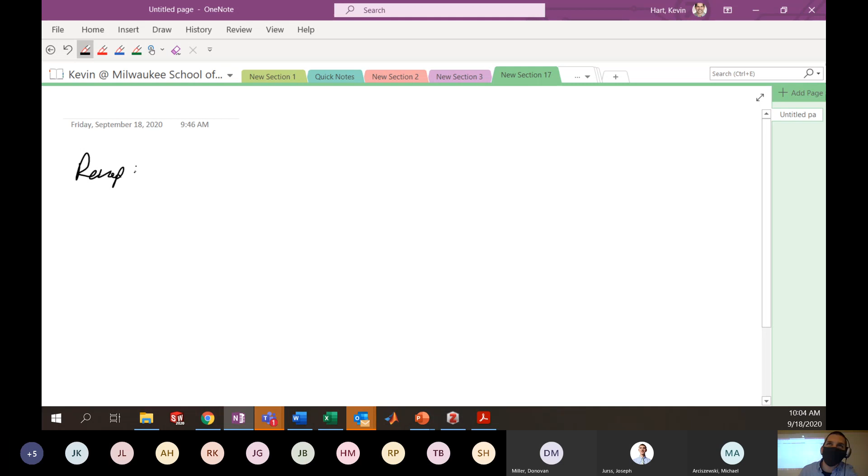And we'll recap a little bit about where we left off. We were talking, and this is in the principal stress notes, so here we'll just do a little recap of what we talked about last time, which is an introduction to principal stresses by talking about stress at a point.

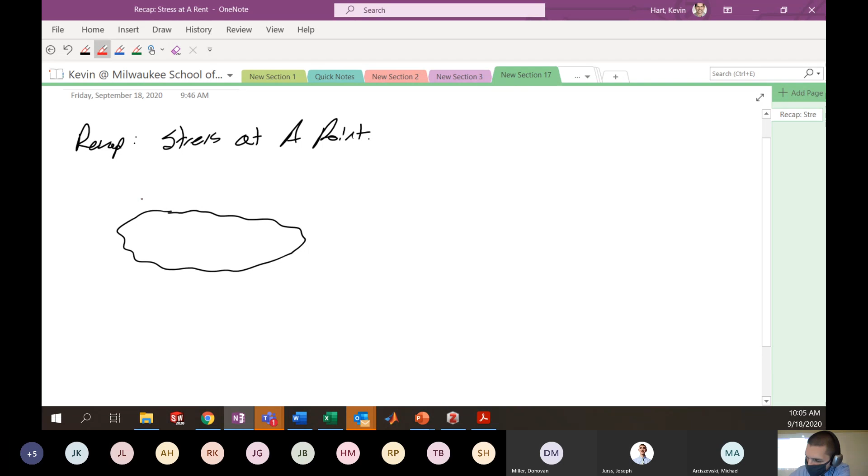We started the lecture, or midway through the lecture last time, by drawing a kind of mechanics potato that was supposedly three-dimensional, even though my drawing skills are suspicious — imagine this is three-dimensional. We drew a series of forces on this, if you remember. The idea here was: if we have some random point inside of this structure, let's call it point O, and we're interested in the full stress state, the three-dimensional stress state at point O, we need to cut through the structure and balance the forces to appropriately calculate things like the normal and shear stresses so that we can get the full state of stress.

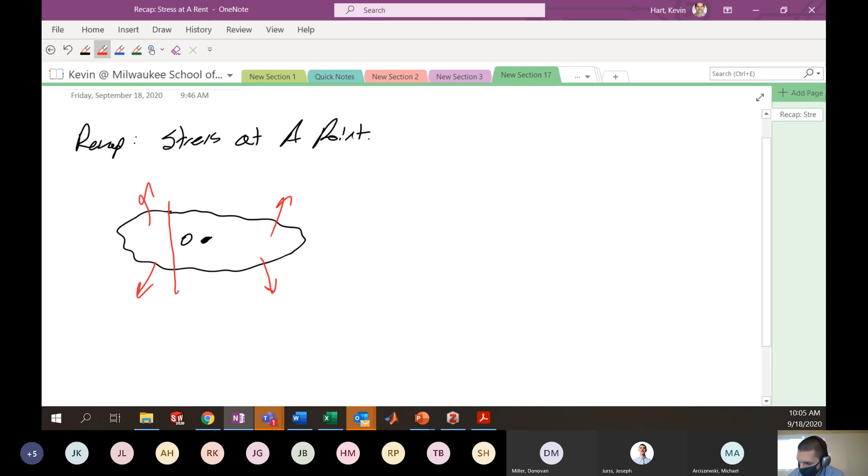So we went through an example where we cut through this guy in a plane that looked a little bit like this.

Okay, and that would give us a cross section here in our cut-through piece that contains point O and still has the remainder of the object on the backside that has some of these forces acting on it. We're going to get resultant forces and moments in this particular cross section, just like you were doing for your homework, relocating the forces on the structure to give equivalent reaction forces and reaction moments.

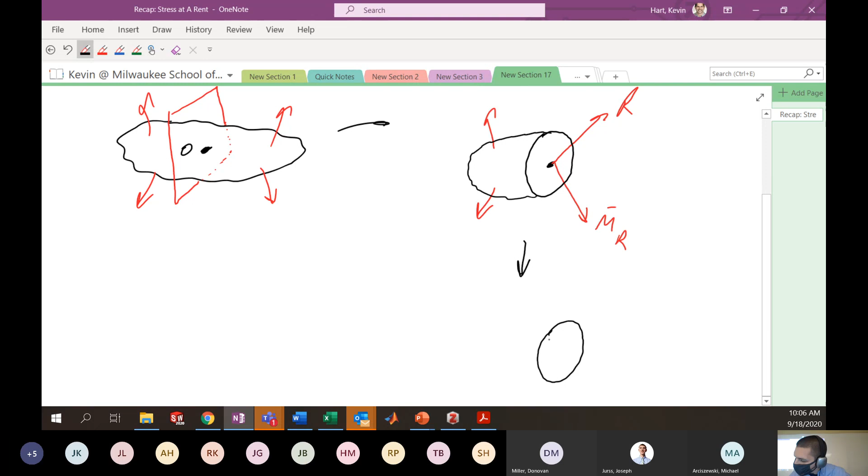And from that, we can then do calculations of the stresses on this particular cross section to get normal and shear stresses. So we end up using our normal and shear stress equations for transverse shear, torsion, axial stress, and bending to give the stresses in this cross section, specifically at this point of interest, point O.

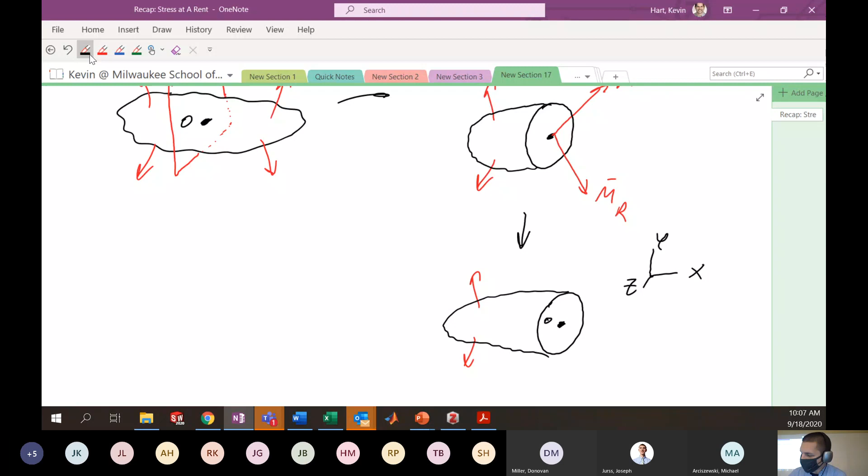So if we have some coordinate system here for this particular piece, which is X, Y, Z, then we can begin to accurately define some of our three-dimensional states of stress with the cut that we have here. So here we've cut through the YZ plane, and this is at point O.

The result here is that we can determine the normal stress on this cross-section, coming off the normal direction here. For normal stress, we use the variable sigma. This normal stress is on the x face in the x direction, so we denote the subscripts as sigma xx, or often you'll just see it as sigma x.

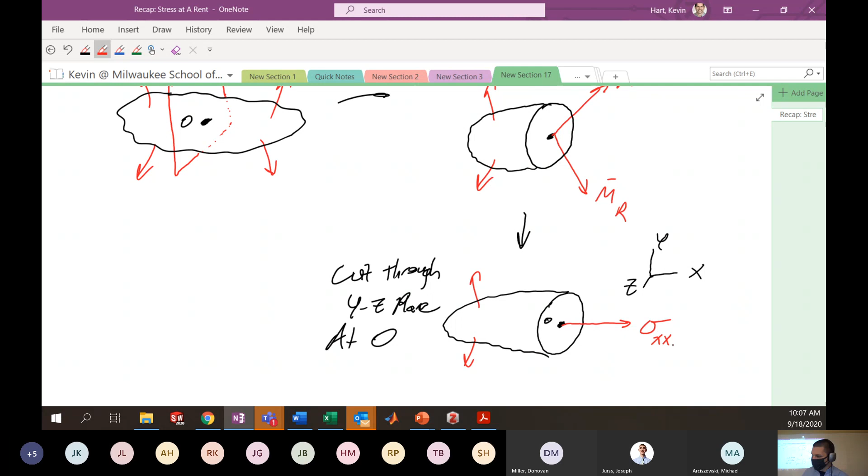As a reminder, when we're using the two subscripts on our stresses, we're defining the face upon which it acts and the direction. That is the normal stress coming off of this face.

We also could potentially have a shear stress on the x face in the y direction and a shear stress on the x face in the z direction. So we could have tau xy and also tau xz.

So by cutting my potato arbitrarily at point O along the YZ plane, I end up with three states of stress that I can calculate using my combined loading strategy that we talked about in week number 1.

So we cut along the YZ plane at O, and we're going to get sigma xx, tau xy, and tau xz. You'll notice when I cut through the YZ plane, the stresses I get are all on the x face, so the leading subscript is all x's in this situation.

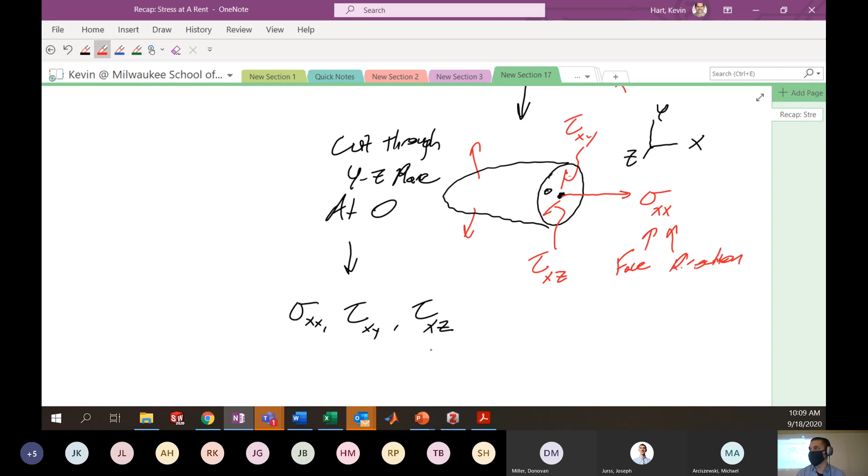Now, that is not the full picture of the stress state at O. I have to do more cuts to get the additional stresses, like the normal stress in the y direction or the normal stress in the z direction. So we need 3 orthogonal cuts to fully define the stress at O. We need 2 more cuts, in quotes, to give the full stress state at O.

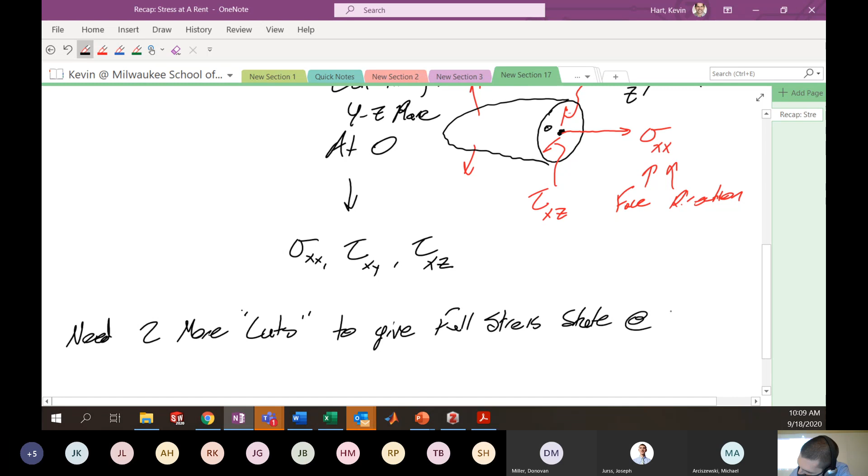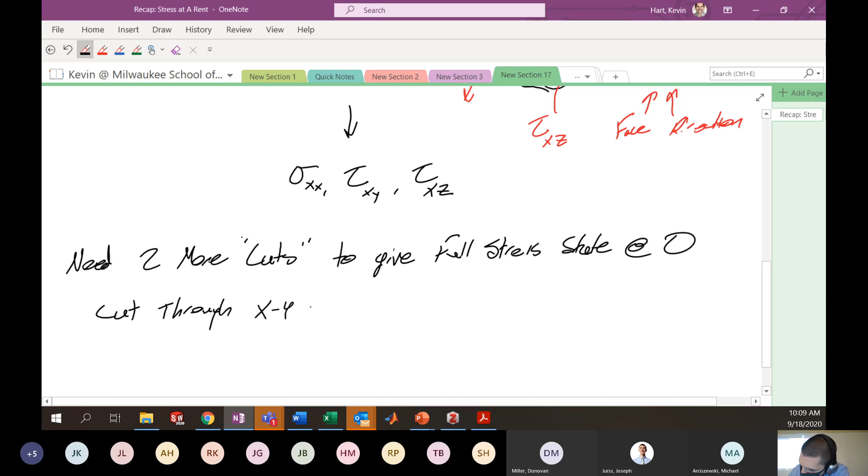So we might cut through, let's say, the XY plane, and have a picture that might look like this. We cut through the XY plane, cutting across the face we already see. Here's maybe my potato face, and we've cut through it so that we're cutting through this plane that is parallel to the page we're looking at. Here in the middle is again your point O, and we'll keep the same coordinate system with X, Y, and Z.

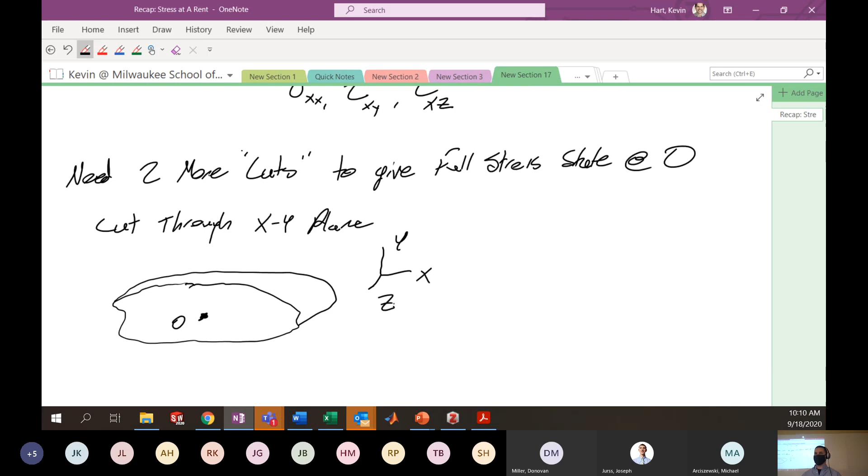Now if I cut through the XY plane, I have the Z face exposed. And if the Z face is exposed, then I can have my sigma ZZ, because it's on the Z face in the Z direction. That's the nomenclature we're using.

And with this cut, we can also define the shear stresses in the two directions, which would be on the Z face in the X direction and on the Z face in the Y direction. So here we have tau on the Z face in the X direction, and here we have tau on the Z face in the Y direction.

Same idea if we go through what is the last plane that we need, which is the XZ cut. You might have your potato now looking like it just got its head lopped off.

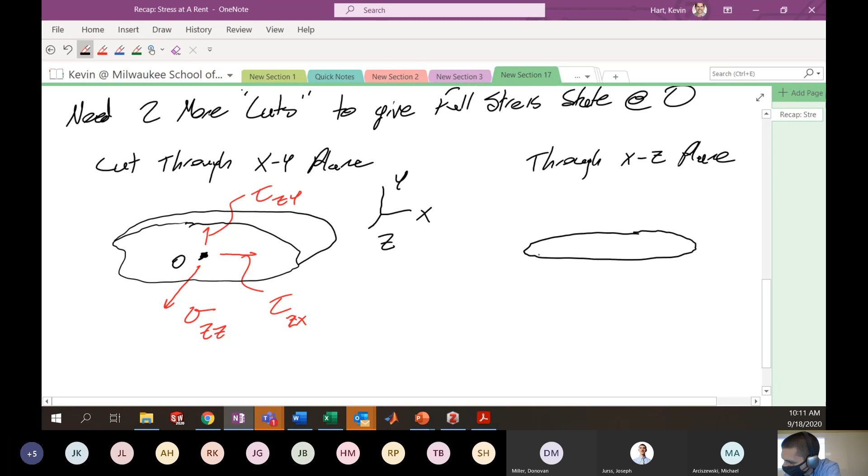Just like 18th century France. You got your head chopped off.

Here's again our point O. And now it's the y direction that is the normal to the surface. So we can define sigma yy. We can define what is tau on the y face in the x direction. And we can define, this one's a little harder to draw, but here's another shear stress, tau on the y face in the z direction.

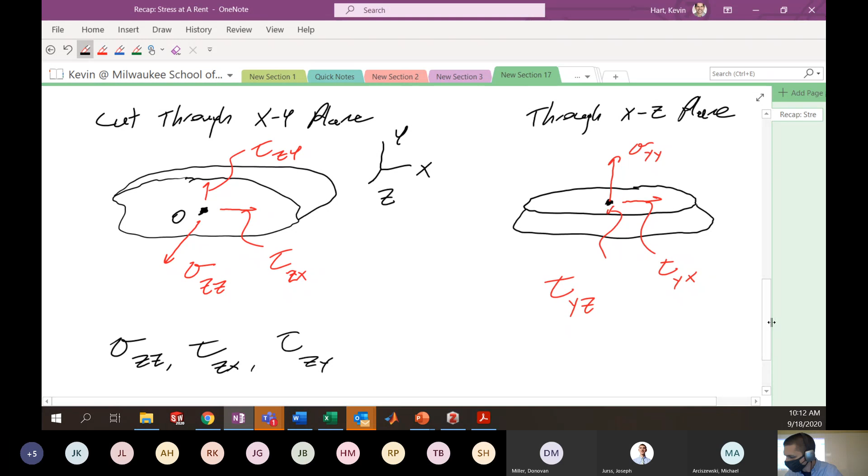So each one of these individual cuts is giving us like 3 states of stress. So here this is sigma zz, tau zx, and tau zy. Here's this sigma yy, tau yz, tau yx.

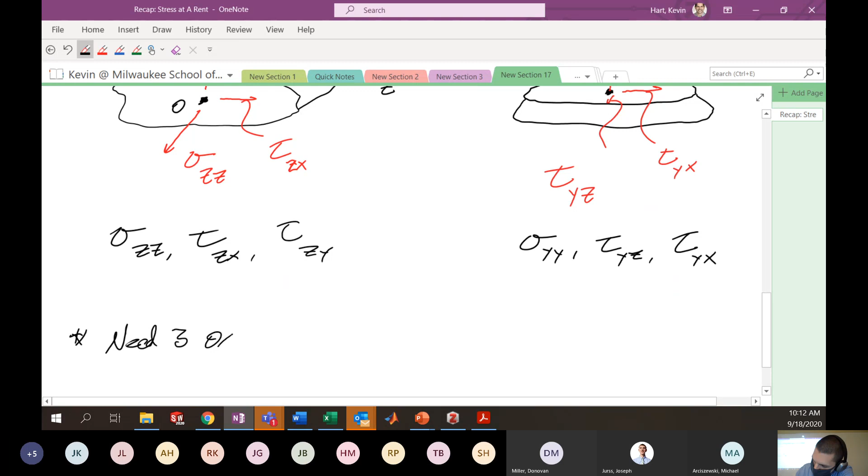So the point is I need 3 orthogonal cuts to really define all of the stress states. And I have 9 possible stress states that could exist at any particular point. So we're getting into new material now, saying we need 3 orthogonal cuts to fully define the stress state.

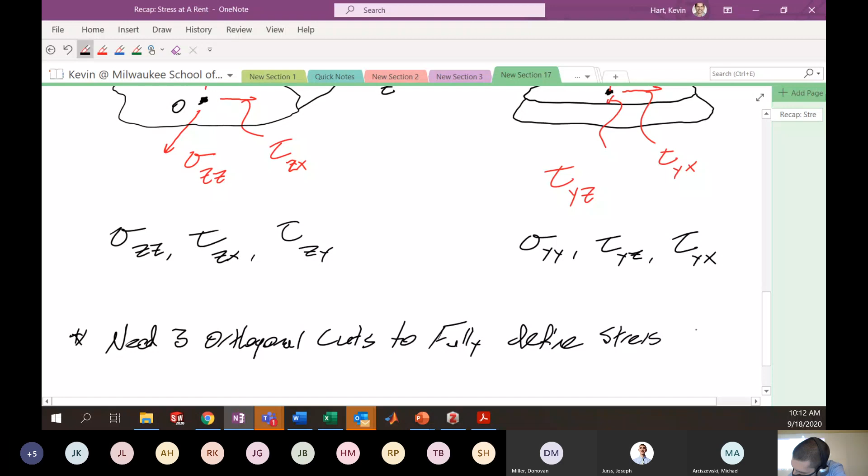Okay. And we have 9 states of stress, the normal stresses, and all kind of 3 of these normal directions would be like sigma xx, sigma yy, or sigma zz.

Man, my hand is shaking. I had way too much coffee this morning. I had like a liter of coffee. It's like a liter of cola. Anyone super troopers? No, super troopers. No. Okay. I want a liter of cola.

And then there's 6 shear stresses.

Looks like I might have a question in the chat here. We have a question. No question.

Okay, the 6 shear stresses that you might have are tau xy, tau xz, tau yx, tau yz, tau zx, and tau zy.

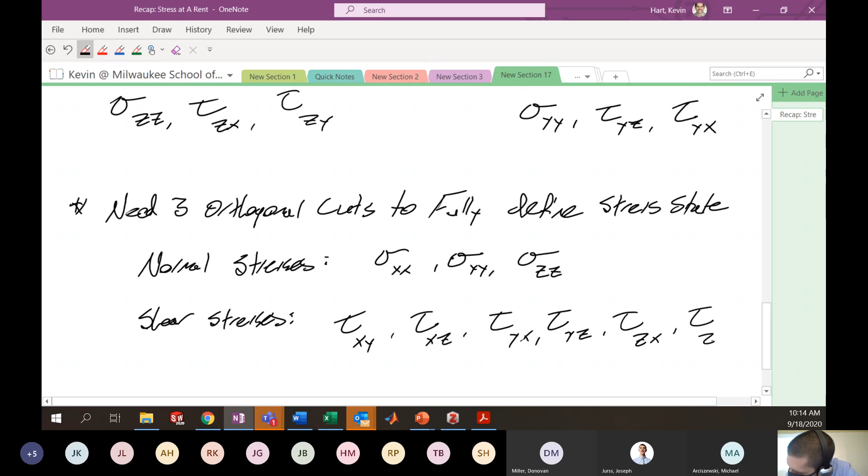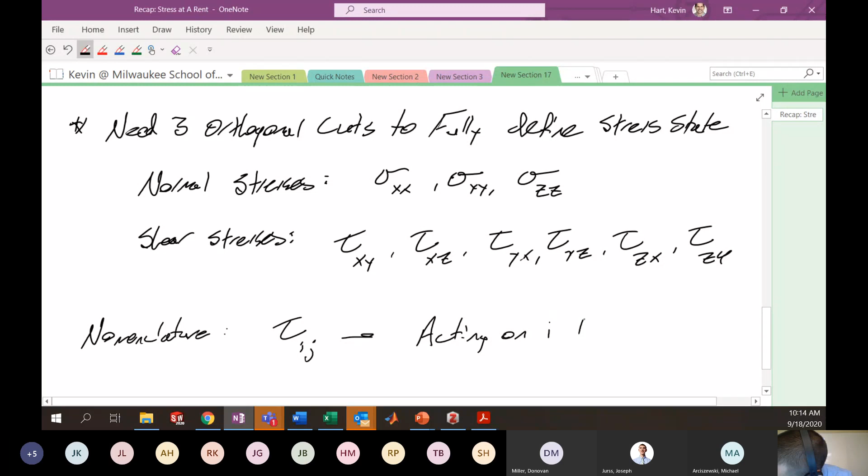Now I'll be very specifically clear here with the nomenclature. I've sort of alluded to this already, but I want to make it crystal clear. When we're talking about a shear stress, we would have something like tau ij. The nomenclature here is that this is the shear stress that's acting on the i face in the j direction.

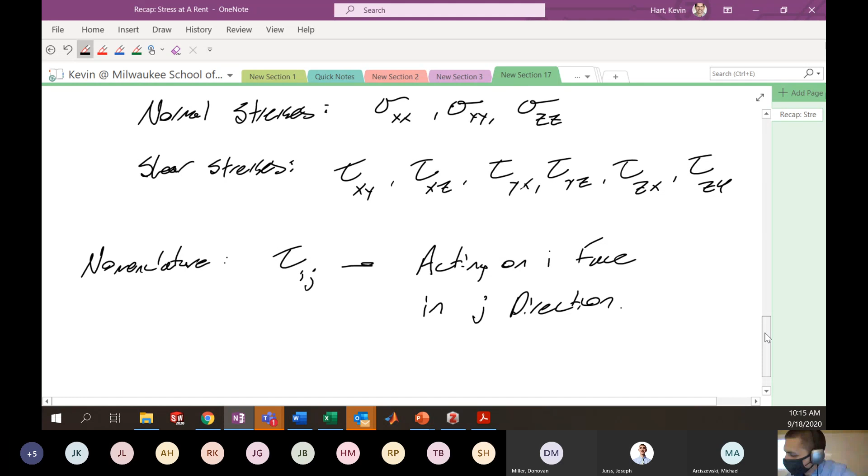Now, maybe you learned this in your 2004 class, but if you're working with conservation of momentum, which is pretty much what we're doing in this class, we're considering everything to be more or less static, so not moving, so energy and momentum are conserved. The derivation of this is beyond the scope of what we talk about, but the basic idea, which you probably talked about briefly in your 2004 class, is that shear stresses with subscripts ij will be equivalent to shear stresses with subscripts ji. So for instance, tau xy is equal to tau yx, tau xz is equal to tau zx, etc.

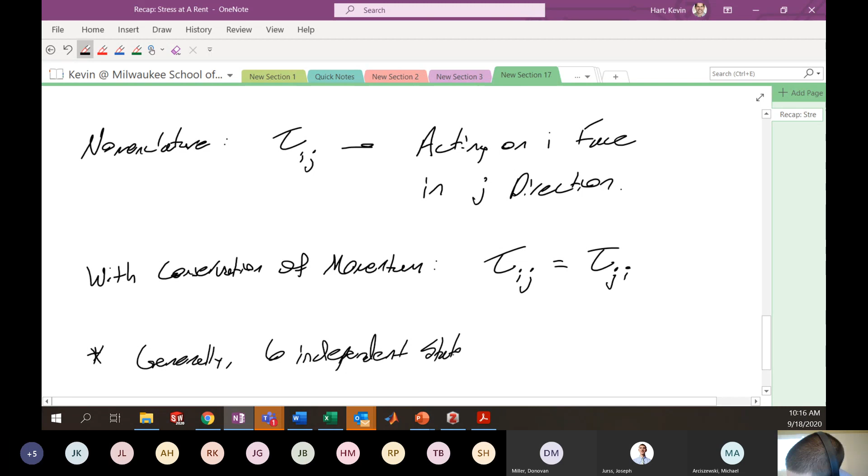So in general, we can look at 9 states of stress, but only 6 of them are independent. And that's because conservation of momentum redundantly shows 3 states of stress. So generally, we have 6 independent states of stress.

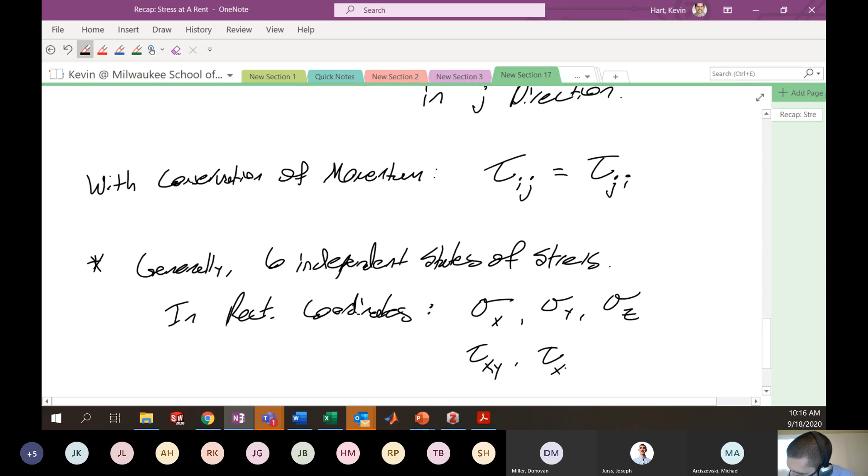In rectangular coordinates, which is what we're working with exclusively here, that's going to be sigma x - we'll make this shorthand, instead of writing the two x's, we'll just have one x. Sigma y, sigma z. In this class, we'll use as the shear stresses tau xy, tau xz, and tau yz. And we know that flipping those subscripts would give us redundant stress values.

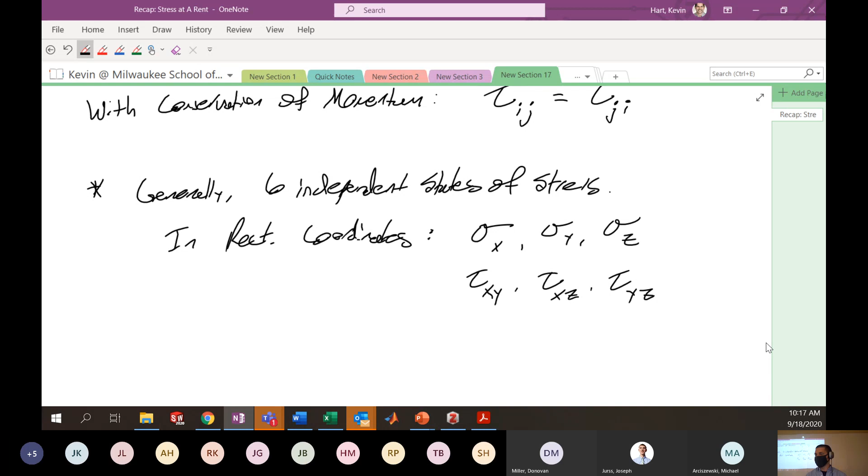Now, the 9 states of stress, 3 of which are redundant, usually get represented when talking about the 3-dimensional state of stress in a matrix form. Or more mathematically accurate, we'd say it's represented in what's called the stress tensor. Have you guys talked about tensors before in any of your math classes? Nope. Okay, I'm not even going to touch that then. Let's just call it the stress matrix.

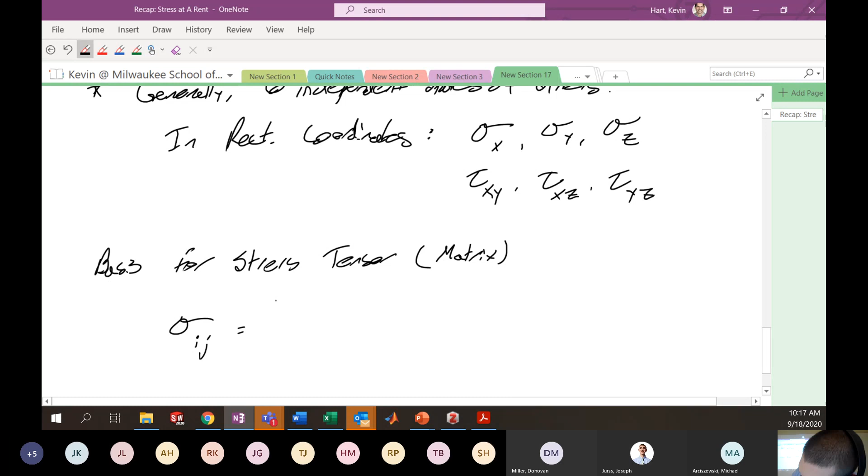So this is the basis for what's known as the stress tensor - this is the technically accurate name, or some people call it the stress matrix, which is not exactly accurate, but okay. It would be represented as something like sigma ij, equal to a matrix that allows us to show all states of stress at one particular time. It would have the normal stresses in the diagonal and the shear stresses in the triangular portions of the matrix. So this is a 3x3 containing sigma xx, sigma yy, and sigma zz in the diagonal.

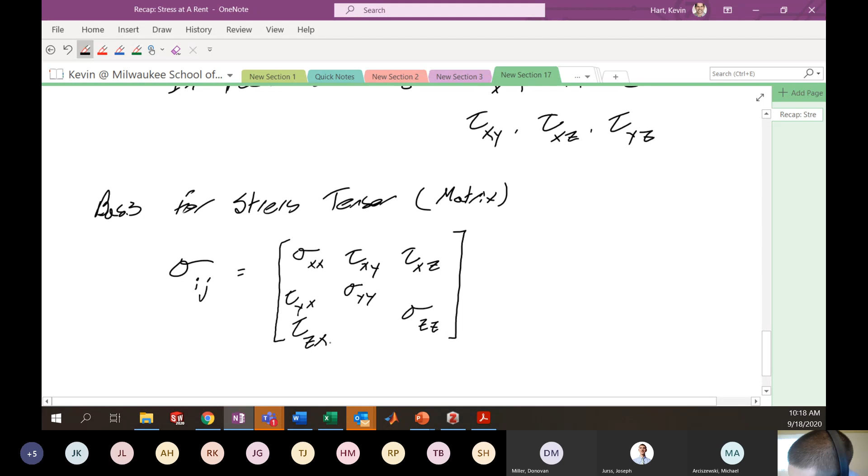And then the shear stress components are going to be along the triangles at the top. So this here is like tau xy, tau xz. Here we have tau yx, tau zx. Over here we have tau yz and tau zy.

So this here is sort of the matrix that is commonly used to represent the full stress state at any particular point. So when someone is asking you what's the full stress state, you could represent it using a matrix that looks like that, where maybe there's numbers filled in. 100 MPa for this value, 80 MPa for this value, so on and so forth. So you may see the full stress state represented in this 3-dimensional sort of manner. This is sort of the basis for 3-dimensional representation of stress at any particular point.

You will see this formation again multiple times in this class, where I might give you a homework prompt that says the full state of stress at the point is bang. And I'm going to ask you, what's the principal stress? What's the maximum shear stress? Blah, blah, blah, which we're going to get into and talk about in the lecture notes to come. So if you see me present a matrix like this, hopefully you understand that's the full state of stress.

Now, this is what it's sort of represented in like a mathematical formation, but people have also used graphical representations of what's happening here. And to represent the full state of stress at a particular point, we would consider the 3 orthogonal cuts that we made to be like 3 sides of a cube.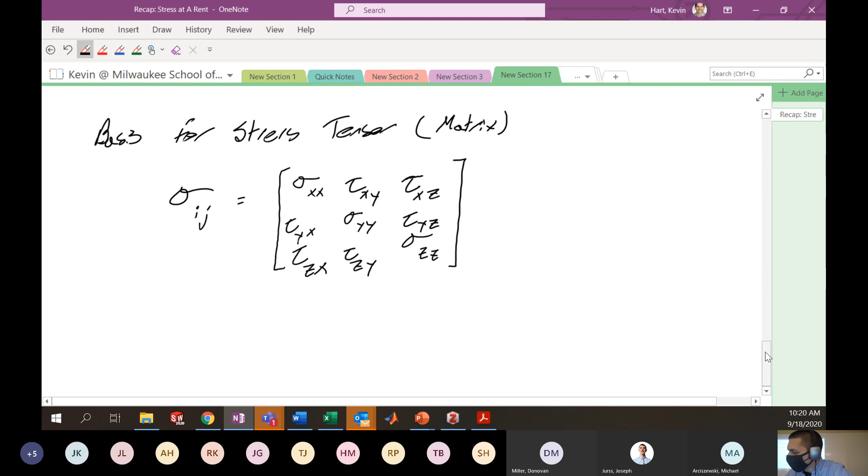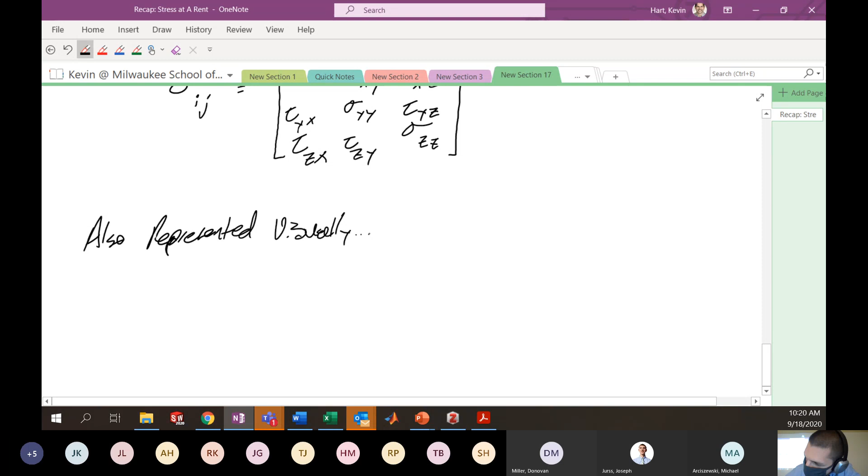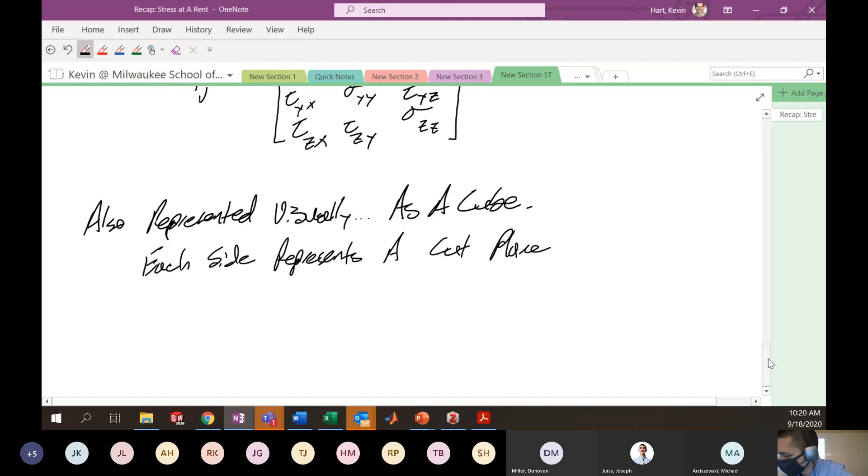So you may represent this visually as a cube, where each side represents a cut plane. So what do I mean by that? Well, when we took our potato, we sort of showed 3 different images of that potato with 3 different slices through it in the 3 orthogonal directions. If we thought about taking those faces that we cut through and making a cube out of those faces, we could represent all the stress components on a singular cube by drawing it appropriately. So I'm going to do my best to make that cube here and give you a representation of what that might look like.

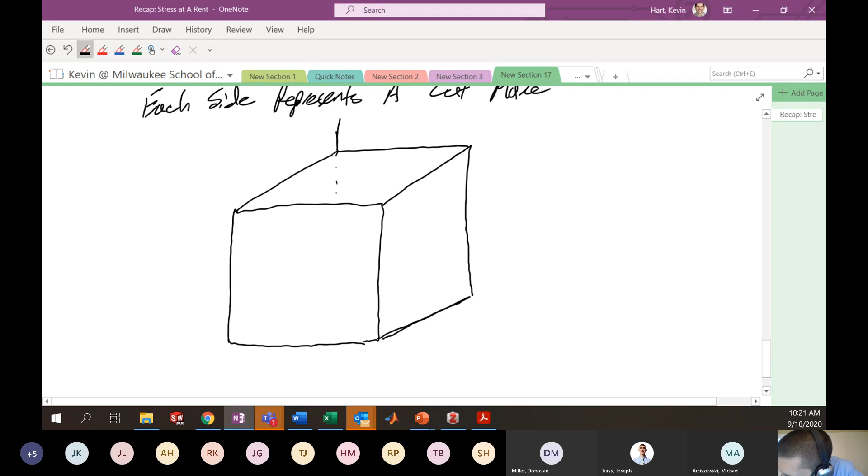Give yourself some space on the paper to draw this accurately. There's also a picture of this in the notes. And let's have a coordinate system here that's running through the whole thing, like X, Y, Z. And we're going to represent all of the stresses on this face based on the cuts that we made to establish the stresses on all of these faces.

So this face here would represent the cut that we made on the YZ plane, and similarly for the top and this side. And so let's draw the stresses that result on each one of those planes, and you'll see what is this full three-dimensional stress state, or what is typically known as the stress cube.

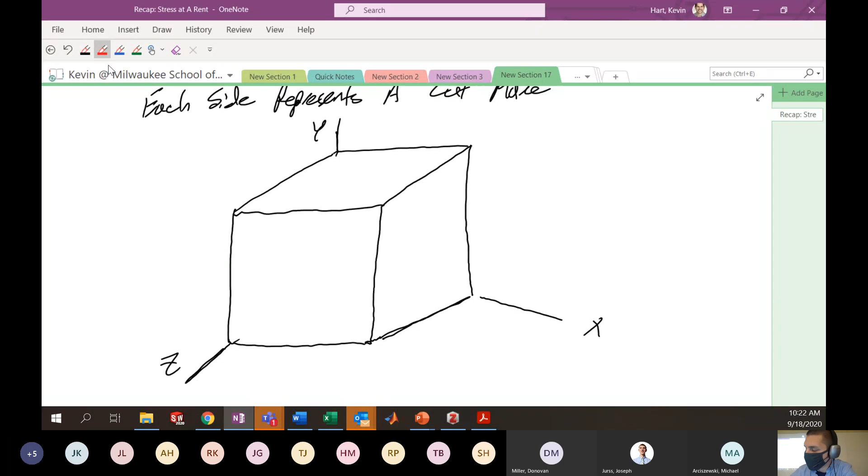So we're going to have the normal stress coming off here, which is sigma xx. We're going to have a shear stress on the x face in the y direction, so this is tau xy. And we're going to have a shear stress on the x face in the z direction, which is tau xz. Similarly, on this face coming off here, we'll have sigma zz, a shear stress on the z face in the x direction, and a shear stress on the z face in the y direction.

On this face, we're going to have a stress coming off the normal direction, sigma yy. We'll have a shear stress on this face, which is the shear stress on the y face in the z direction, and here we have a shear stress on the y face in the x direction. These are your 9 stress components.

And the redundant ones would be ones that sort of pinch corners together. So tau yz and tau zy are redundant. This tau zx and this tau xz are redundant. This general picture is commonly called the stress cube. I think of my office as the stress cube, but this is the real stress cube.

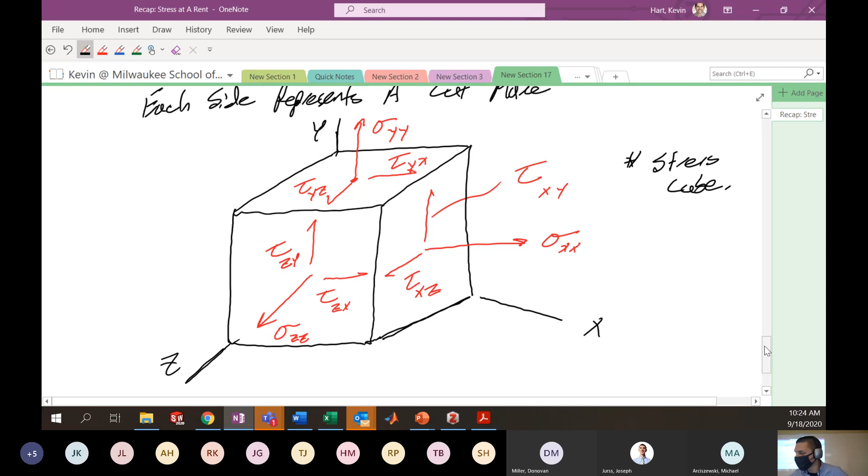You have seen this idea before in ME 2004. When you were in 2004, you generally talked about a two-dimensional state of stress, usually represented with a single square looking at one particular face of the cube and neglecting all of the out-of-plane stress components. I'll show you how this cube gets simplified to what you've normally seen in your 2004 class, and that is by assuming a state of plane stress.

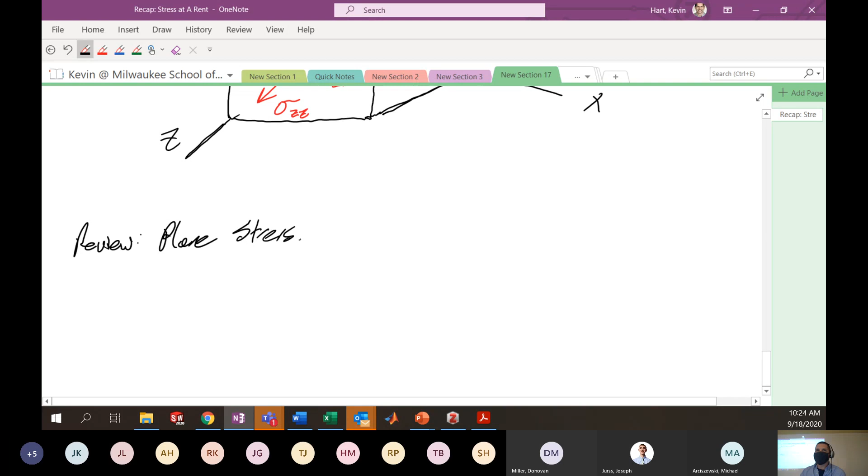Let's review plane stress quickly. You should have talked about plane stress in 2004, but I'm going to bring it home here for you just a second. There are many situations in the world where you can assume that the out-of-plane stress components are equal to zero.

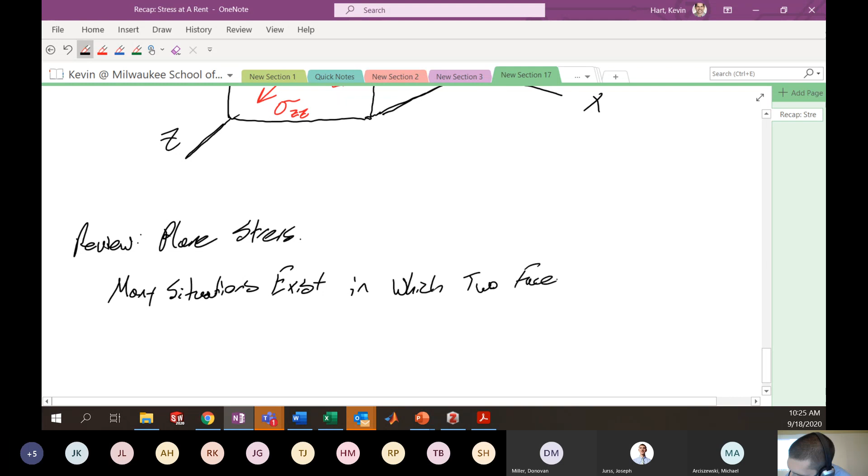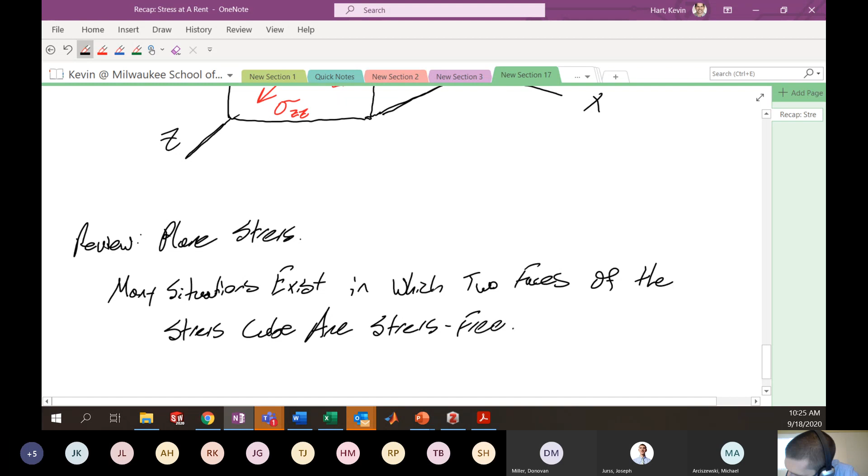Many situations exist in which two faces of an element, or of this stress cube, are free of stresses. We would call this a state of plane stress.

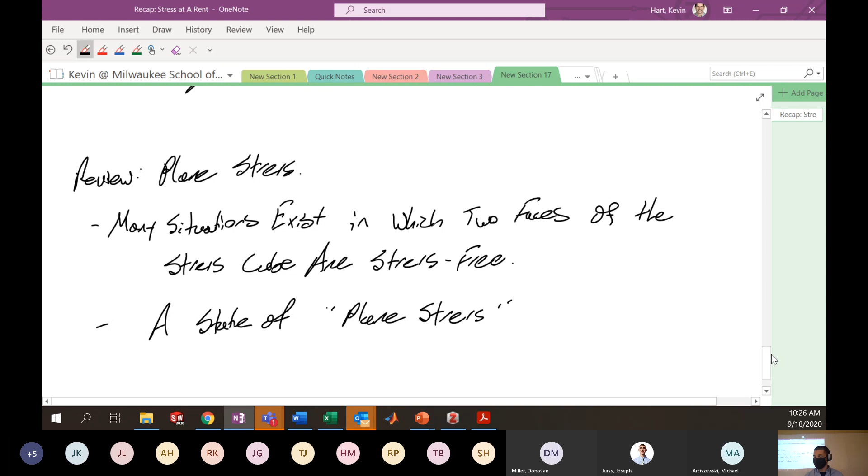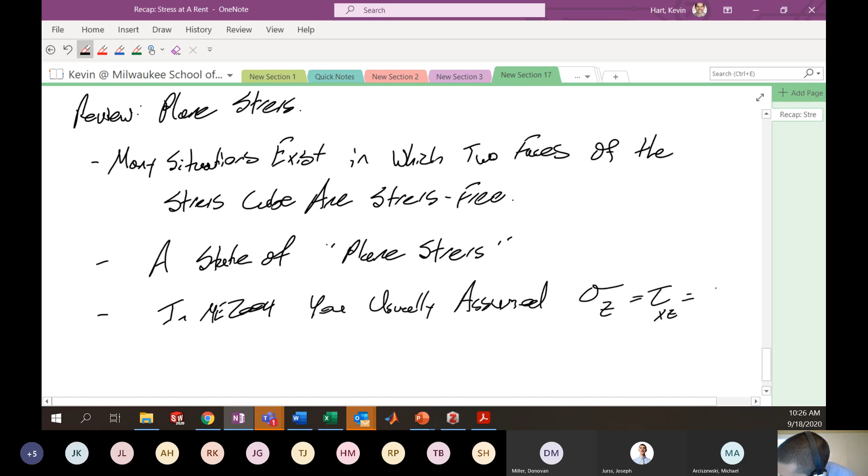Typically, when you were working in 2004, you assumed that the z direction was stress-free, meaning you had no stresses, either shear or normal, in the z direction. So in ME 2004 you usually assumed, whether you knew it or not, that sigma z, tau xz, tau yz, tau zx, and tau zy are all equal to 0. Those are assumptions you usually made to assume a plane stress condition, and this leads to a 2D state of stress.

Let's go back to our cube and draw what it would look like if all of these stress components were neglected and set to zero. This is the stress cube for plane stress. I'll draw it a little more quickly. So if we assume that sigma z, tau xz, tau yz, tau zx, and tau zy are all equal to 0...

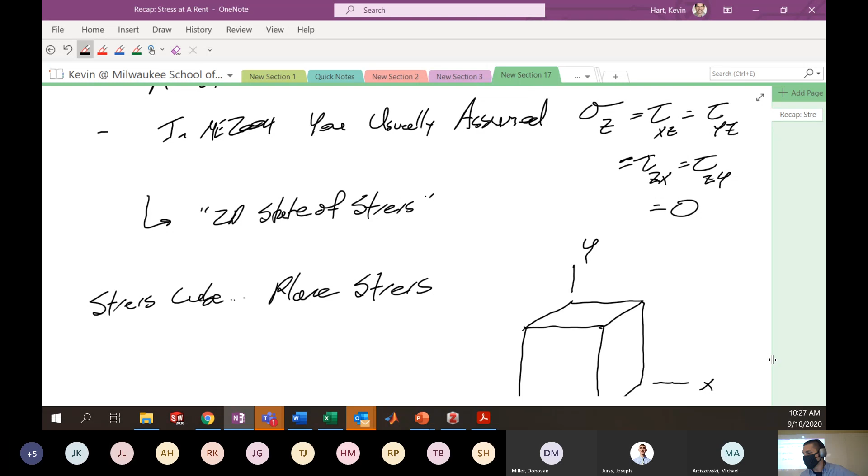...then everything associated with that face goes away. The normal stress and shear stresses on that face go to zero. The only stresses you'd see are on what would be the xz plane and the yz plane. So you'd see coming off here a sigma yy, coming off here a sigma xx, then here your tau xy, and here your tau yx.

You would not have this component of shear, because for that component to exist, you'd have to have that other component of shear. So those guys do not exist because your tau zx is equal to zero.

Now remember, to balance this out you have to have these stresses on the opposite side to make things hunky-dory. So looking at the bottom or back side of this cube, you'd have, to balance, on the negative y face and negative y direction another sigma yy. You'd have on the negative y face and negative x direction this guy on the bottom side, and on the negative x face and negative y direction, thinking of this as the back side of the cube, a tau on the negative x face and negative y direction, and also here your tau on the negative y face and negative x direction.

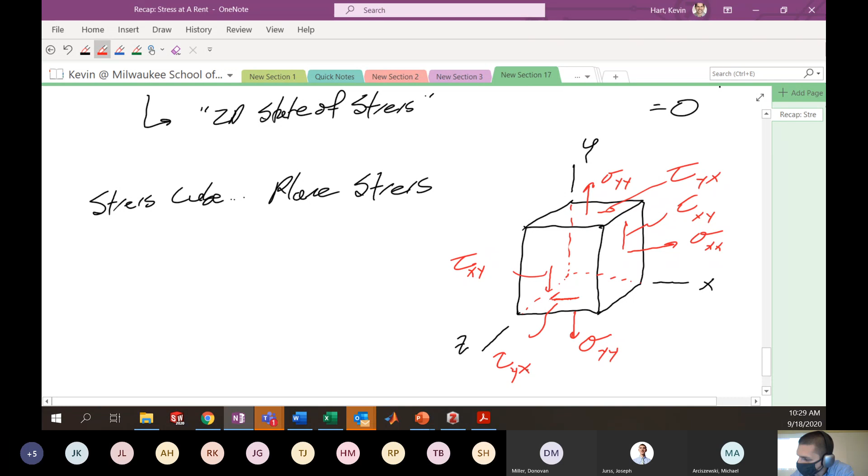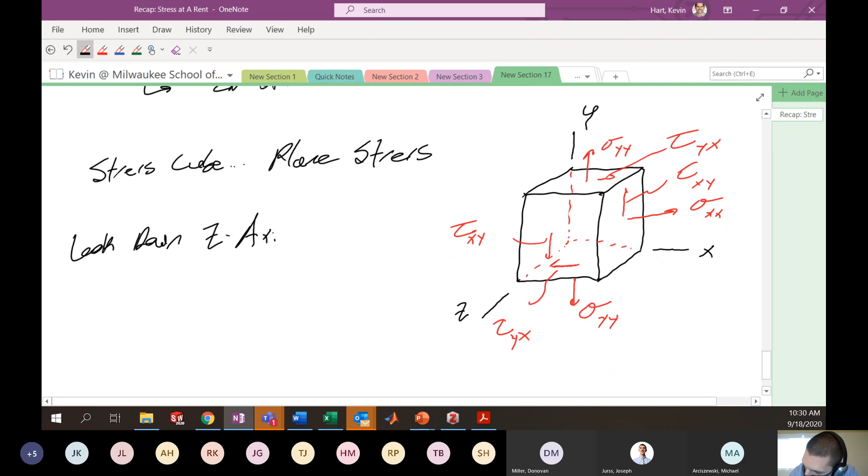If I was looking at this cube down the z-axis, I would just see a 2D square with these stresses represented on it. So if you look down the z-axis, you would see this.

That should look pretty familiar. You have probably worked almost exclusively with these two-dimensional elements, and I want you to understand that's just one face of what would be the three-dimensional cube representing the full stress state of the material. Fortunately, a lot of situations exist where this is all you really care about—every surface of a material is basically in this condition, so it's very common to make this assumption on the surface of a material.

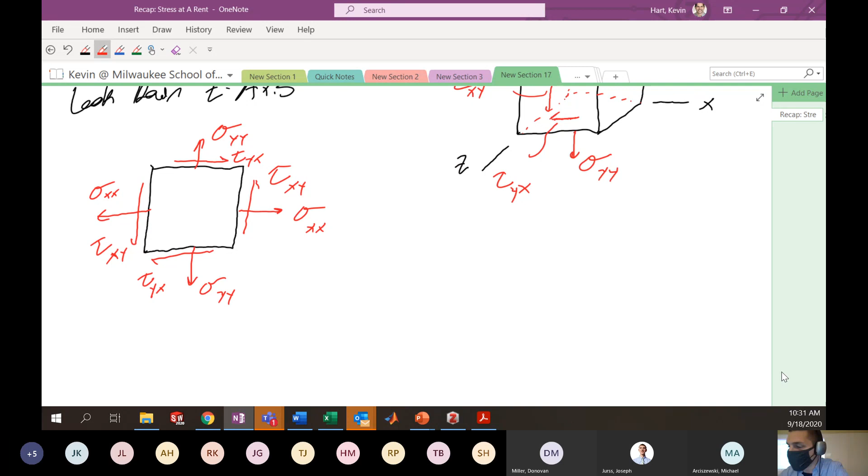I just wanted to show you the three-dimensional state of stress and the analogy from 2004, which was like this 2D element you have. That closes out the introduction to this section.

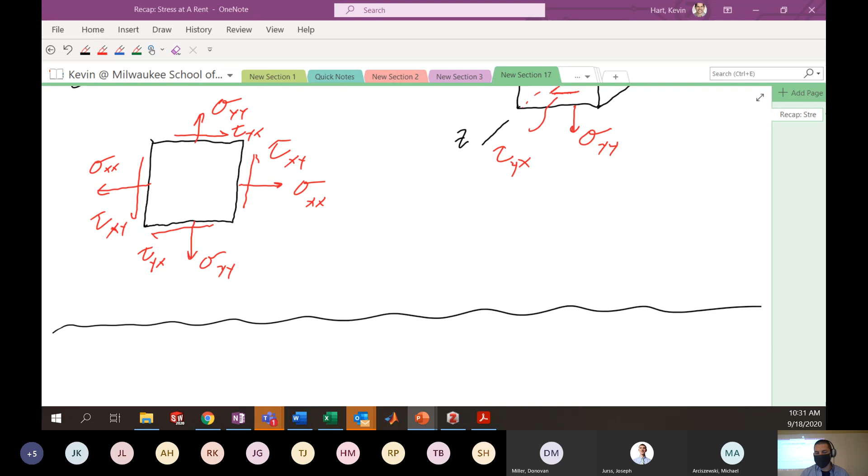Now I want to get into the meat of the discussion, and that is talking about principal stress. You probably talked about principal stress in 2D for your 2004 class, but I told you I was going to rebuild this from the ground up because I'm a little suspicious about your 2004 class, because in the spring it was... suspicious. All right.

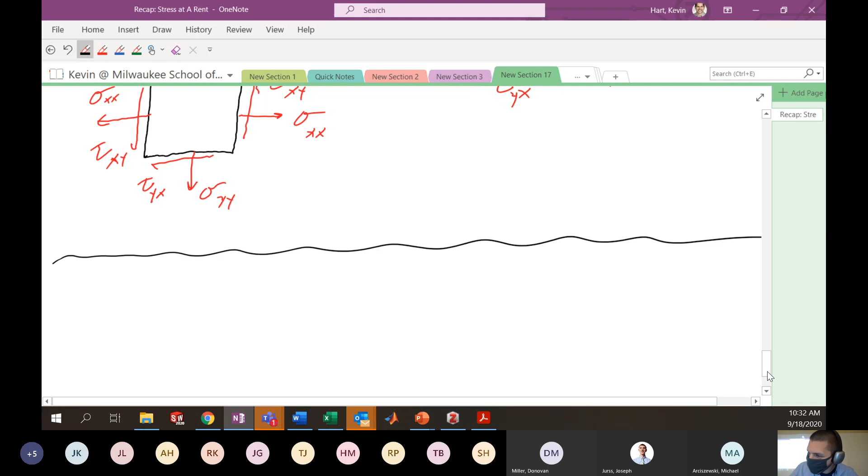So let's start with talking about what the principal stress is and how you might derive it or go about doing it in 2D, and then we'll move on to doing it in 3D. The first thing we have to do along that path is talk about stress transformations.

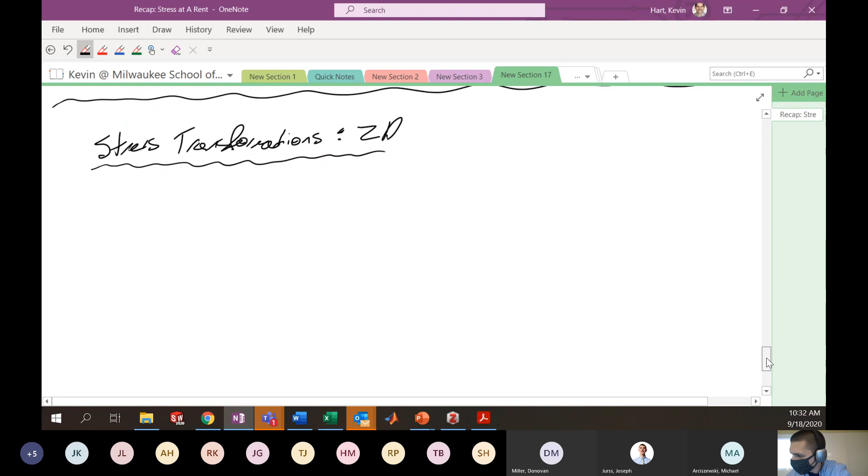Specifically, I'm going to start in 2D so we're all hunky-dory and things are good. Let's assume we have our 2D stress element in an XY plane, and we want to know, given some elemental stresses like sigma x, sigma y, tau xy, what the state of stress is in some alternate axis.

So assume we have a 2D stress state at a point with known stresses sigma x, tau xy, and sigma y. The picture you should have in your head is like this.

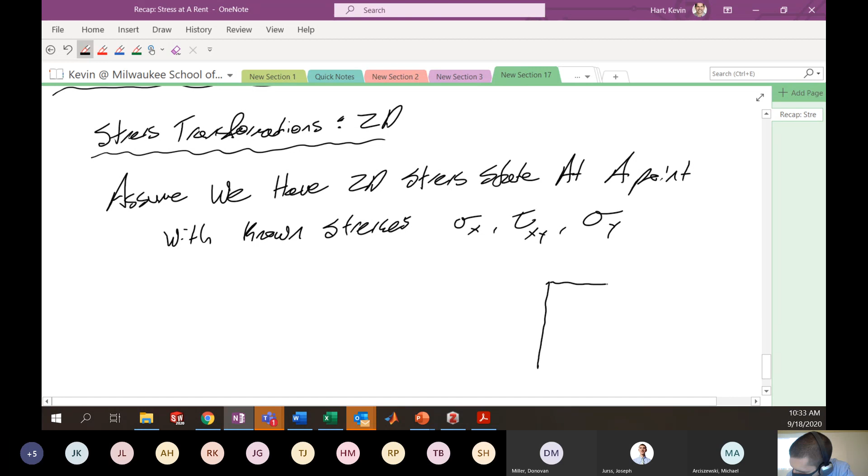This 2D stress element picture, where you know sigma x, sigma y, and your shear stress component is tau xy — I'll just label it generally, since all these shear stresses are more or less equivalent. So that's the state you should have in your head, and we could assume here that we have rectangular coordinates that are like x, y.

Now the point is that there are many situations where you are given a state of stress at a particular point in some coordinate system, but you're more interested in learning about the stress state in some other axis. This actually comes up on your lab, your combined loading lab.

So you have a strain gauge on your lab that is aligned with some coordinate system that's not necessarily of interest for doing analysis on the member. So if you remember from your combined loading lab — let me just have an aside here.

Remember in your combined loading lab, you've got this bar. Guy walks into a bar.

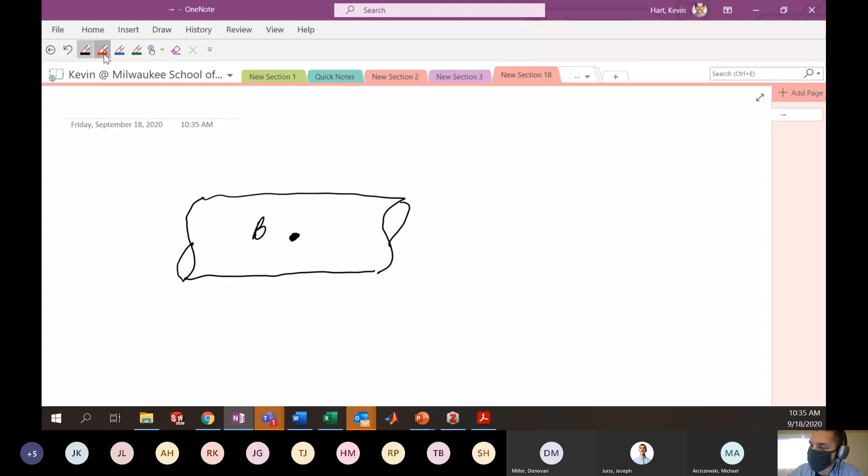Just kidding. And you've got some point like on the side of the structure B, and there's a series of strain gauge rosettes that come off it looking something like that — along the axis of the bar and plus or minus 45. This has an innate coordinate system associated with it that looks something like this.

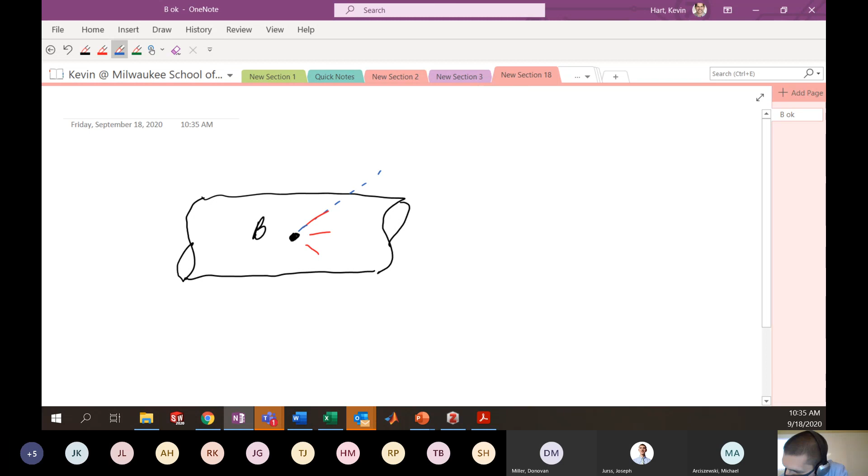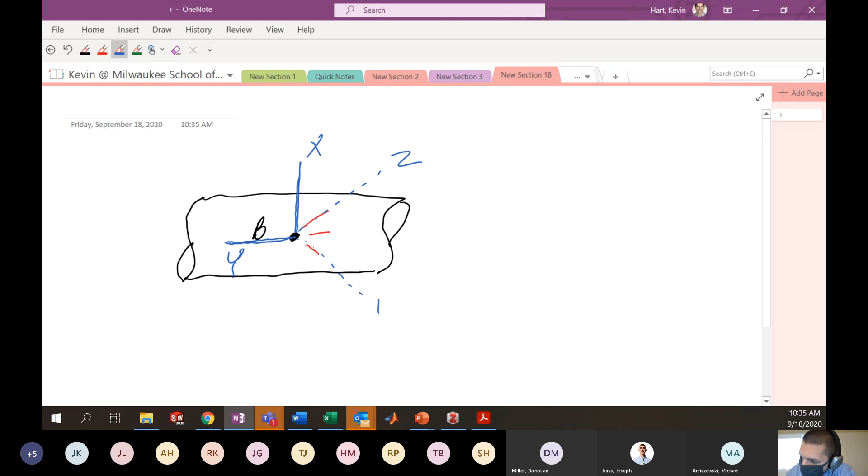So let's just call it the 1, 2 coordinate system. But that coordinate system is not necessarily useful for doing analysis on this bar. Typically, if you're going to do analysis on the bar, you probably want to work in a coordinate system that looks like this, where you have some axis along the bar and some axis upwards. Let's call it cap X, cap Y, or something equivalent. So I need to understand the stress at this particular point in the cap X, cap Y coordinate system.

But because of the measurements I've made in the lab, I might have the stress given to me in the 1, 2 coordinate system. So if I want to do my analysis in the cap X, cap Y coordinate system and sync that up with something I might know in the 1, 2 coordinate system, I'll need to rotate from the 1, 2 axes by, let's say, an angle of 135 degrees to get to what would be the cap X, cap Y coordinate system.

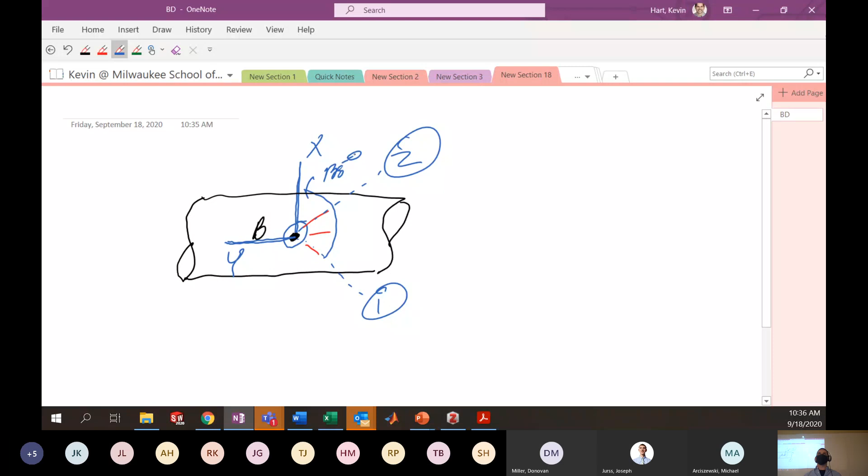So a lot of times students ask, what is the point of stress transformation? What's the point of strain transformation, etc.? This is why. Maybe you have a known state of stress or strain because of how you put your strain gauges on, and that coordinate system is not necessarily aligned with the coordinate system that's natural for the problem. So it can be useful to determine stress states in alternate coordinate systems so you can match them up.

All right, so with that idea in mind, let's assume there is another coordinate system that we're interested in having our stresses determined. Let's say that we want to have stresses in an alternate coordinate system.

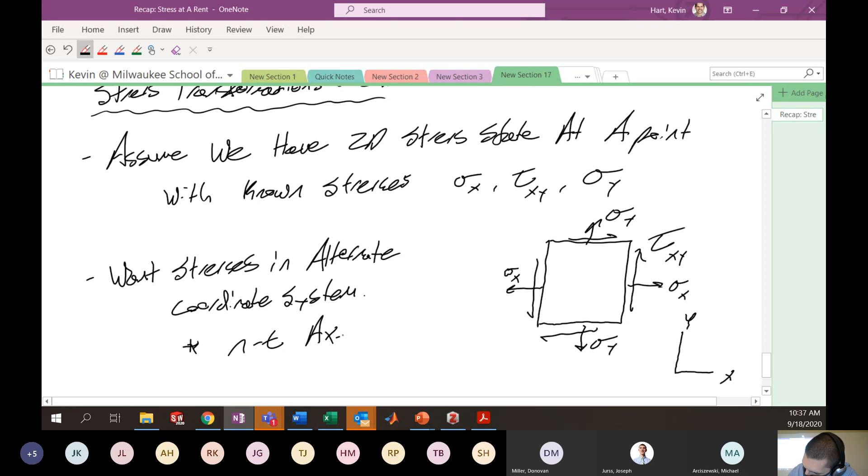Let's call this alternate coordinate system normal and tangential axes, n and t. Let's say these normal and tangential axes are at some counterclockwise angle from the x, y axes, which is the angle theta. So if we were to draw the other coordinate system here, it would look like this n and this t, at an angle here, which is theta from x and y.

Now, if I already knew sigma x, sigma y, and tau xy, I could take the element I have and cut along one of those n and t directions, and re-examine the stress along that cut side. Let's say I make a cut in this structure along the t direction, where I've sliced this guy along an axis like the t-axis, such that this angle here is the angle theta. That's what you'd want to achieve if cutting through this to get information about what's happening in the normal direction.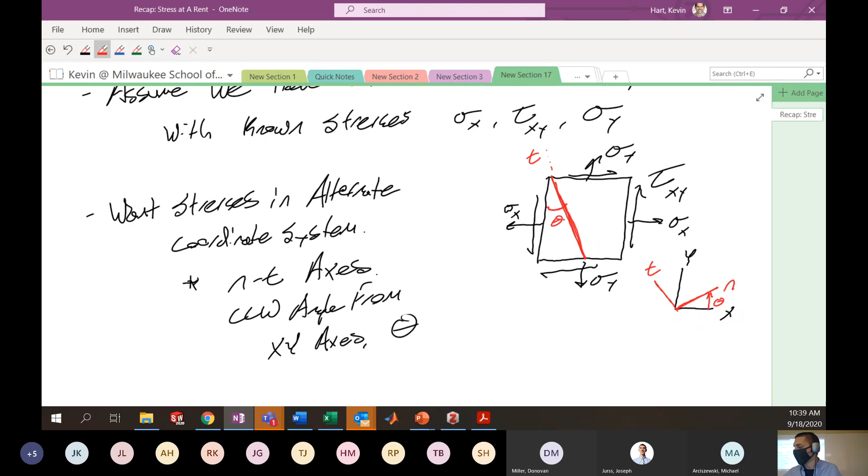So after we do our cut, you end up with what looks like a triangular element that looks like this, where we still have our x and y directions, but now we have our associated n and t.

We might define some things here. This axis coming off here is the n axis, and this axis coming off here at the top is the t axis. We're interested in the stress state on this particular face. When I cut through this, I'm going to see a normal stress to that face, and I'm also going to have a shearing stress on that face, which looks like tau n t, on the normal face in the tangential direction.

That has to be in balance with the stresses that are already on the object, on the left-hand side and the bottom side, which I know. On the back side here, I have a stress in the x direction. On the bottom side, I have stress in the y direction. And on the sides here, I have tau xy, equivalent for both sides, assuming tau xy and tau yx are the same.

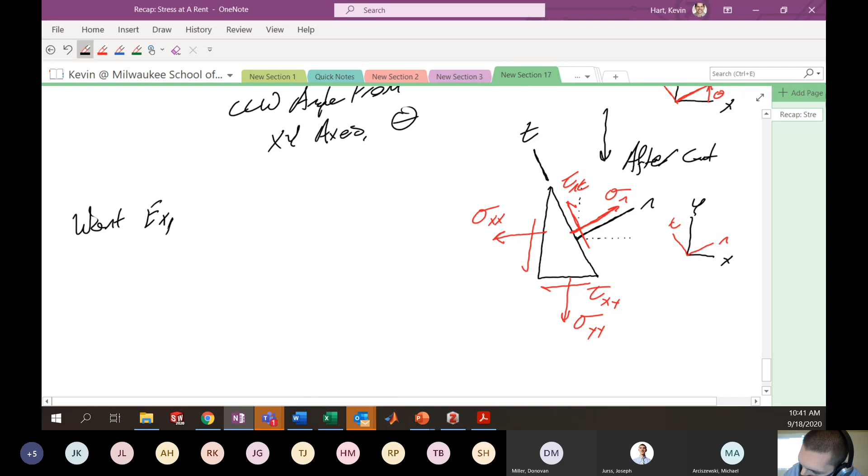So the point is I want to come up with an expression for the normal stress in the new coordinate system and the shear stress in the new coordinate system that uses sigma x, sigma y, and tau xy. So I want an expression for sigma n and tau n t in terms of sigma x, sigma y, tau xy, and the rotation angle theta. That's going to be an important piece of information.

Now, how would one achieve this? We know that this structure, with an assumption in this class, is not moving. Because our structure is not moving, the force equilibrium must hold - think about your statics class, the sum of the forces in all directions must equal 0. To determine the stresses in the n direction, we'll write that stress in terms of the force required to achieve that stress divided by the area upon which that force is acting, which is the area of that length into the page. We'll write these stresses in terms of the force and use force equilibrium to write sigma n in terms of the components of sigma x, tau xy, and sigma y that exist in sigma n.

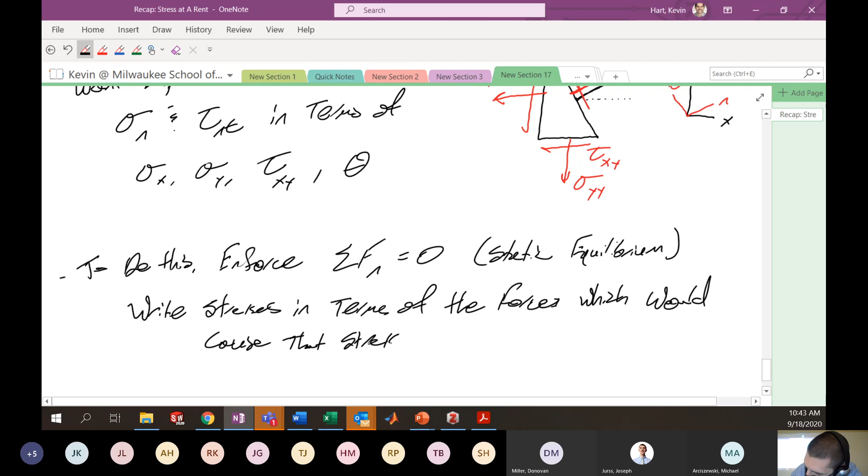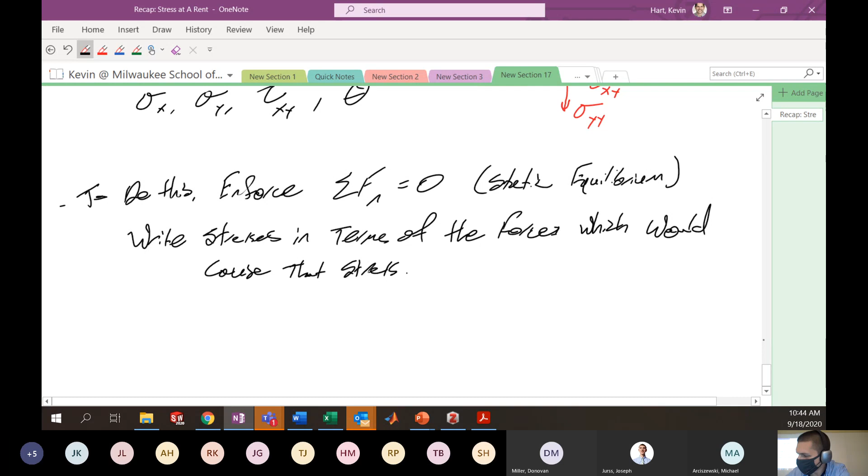So now to do this appropriately, let's define the geometry. We already sort of have the stresses on there. Now let's talk about our geometry. I want to make sure I'm very clear about this. This line here, we're going to assume is extended into the page.

And it has an area of that length that you see on the paper into the page, which is dA. That is the length of that line, into the page, some unit thickness, whatever you want, T.

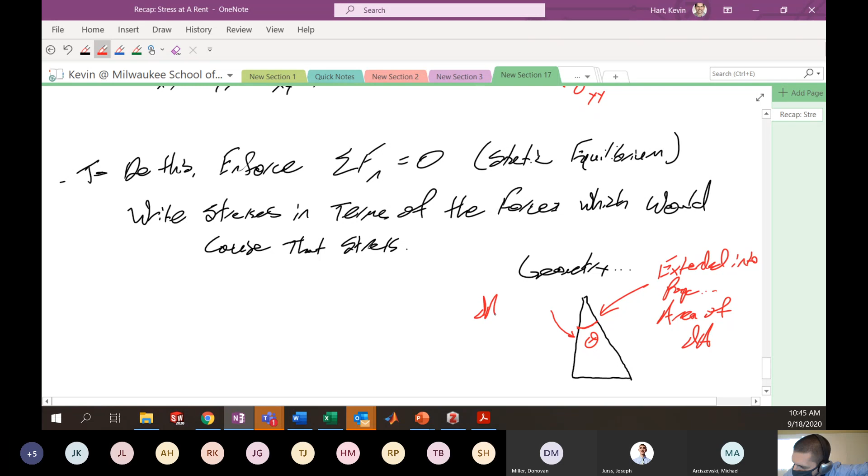That means that if we have an angle here of theta, this particular face has got an area of dA times cosine theta. This particular area has dA sine theta. We all understand that?

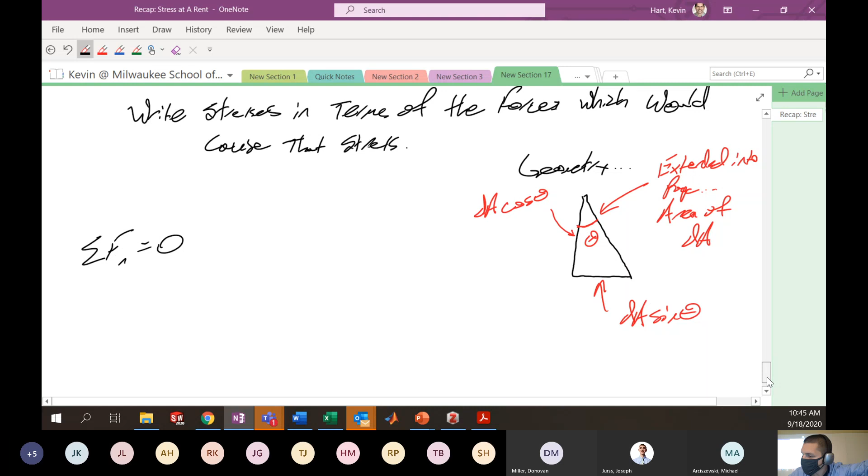Okay, so now we're about ready for our force balance. Sum of the forces in n equal to 0. So the first force that I'm really going to see is maybe the force that's associated with this normal stress here. We'll recall

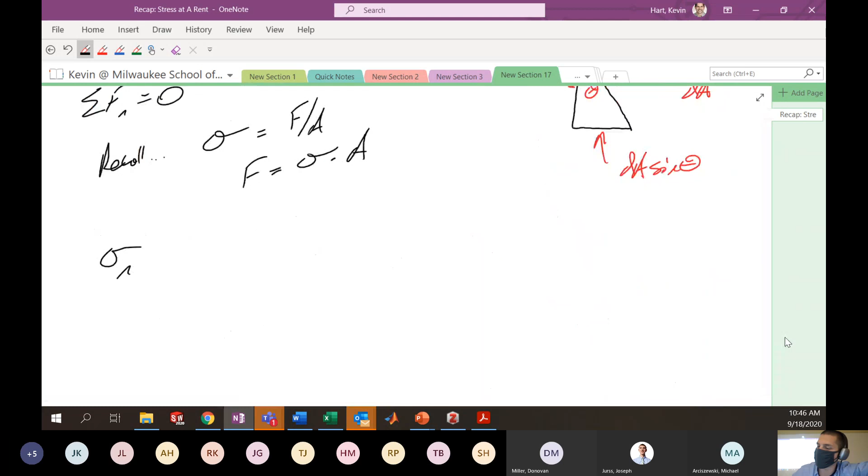that stress is equal to force divided by area. That means that the force would be equal to stress times area. So if I'm enforcing equilibrium here, I would say that my normal stress acting on this particular face, multiplied by the area of that face, would give me the force in the n direction that would cause that sigma n. So sigma n times dA would give me a force, right?

And this is all entirely in the positive n direction. So this here is like the force caused by N from sigma N. Okay, hopefully we sort of understand that. All right.

That's got to be balanced out by whatever forces are generated from, let's say, sigma x, sigma y, and tau xy, right? Now let's take just a close look at what is this sigma x value, right?

The arrow here is sort of pointing kind of to the left, but we want to write the component of sigma xx in the n direction. So if we thought about extending this n axis backwards here, we would see that this stress, sigma xx, is acting at this angle of theta. And so the component of sigma x that is along n is sigma xx times cosine theta.

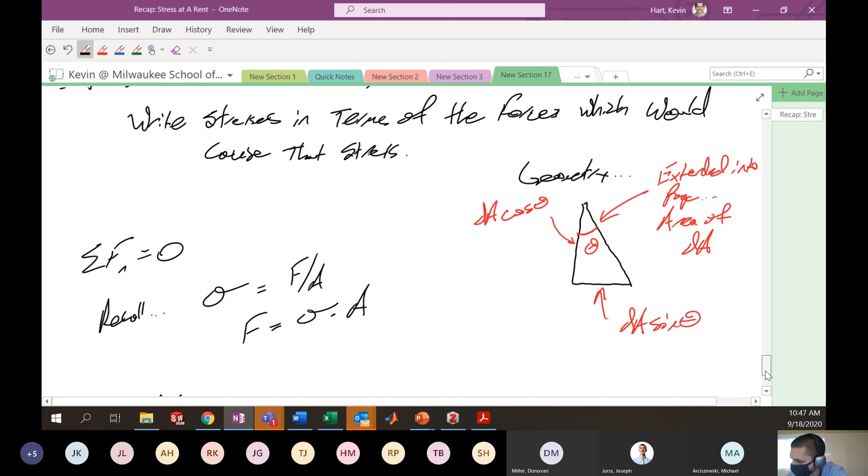Since it's generally pointing in the negative n direction, we would have minus sigma x times cosine theta, times the area upon which that stress is acting, which here is dA cosine theta. So this is the amount of stress that's in n, and this here is the area upon which that stress acts. So stress times an area. And it's acting generally in the negative n direction.

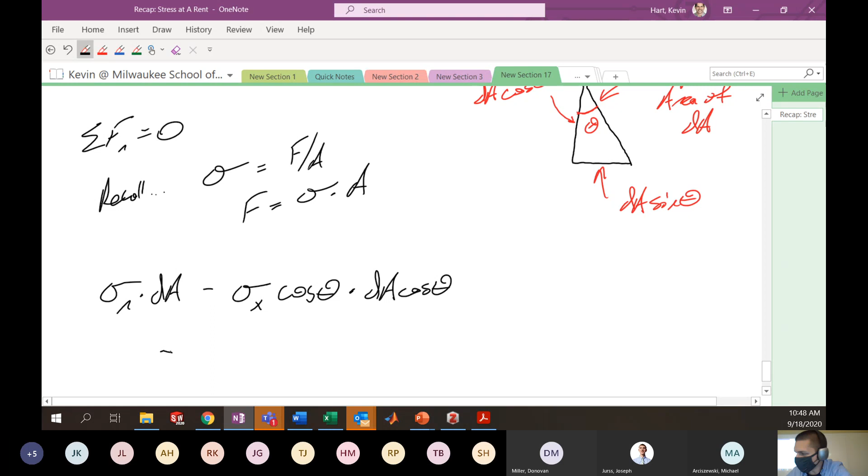Similar idea for what's happening with sigma y, except now we have sine components. So here's my sigma y, and this is acting at an angle of sine theta with regards to the n direction. So we have sigma y sine theta, that is the amount of stress that's in n, multiplied over the area at which it acts, which here is dA sine theta.

I have to keep going, I'm not quite done yet. I still have contributions of tau xy here, which is acting at an angle of cosine theta, and this guy here, which is acting at an angle of sine theta.

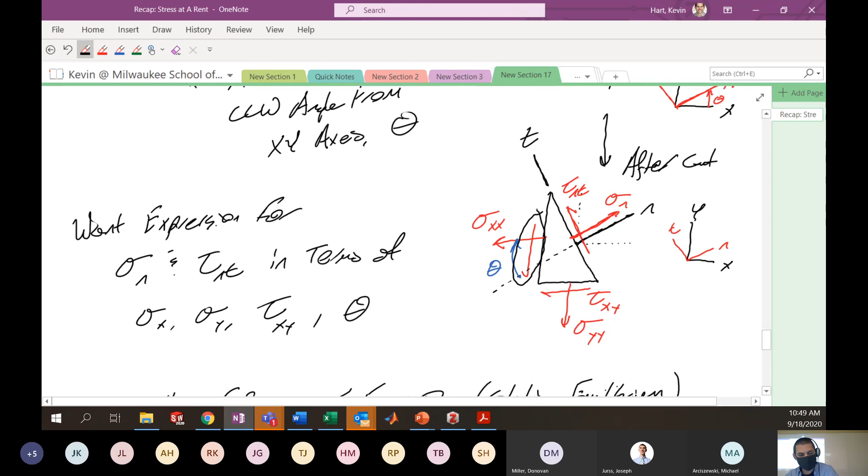So this here will be like minus tau xy sine theta times dA cosine theta. So this is the shear stress that is represented by this guy here.

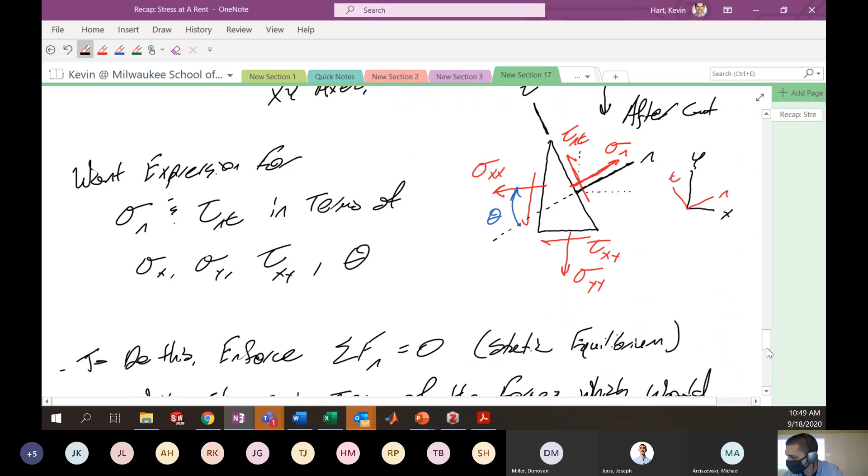Minus tau yx or xy, however you like it, cosine theta dA sine theta. This all equals to 0. That's your force balance for this particular 2D element.

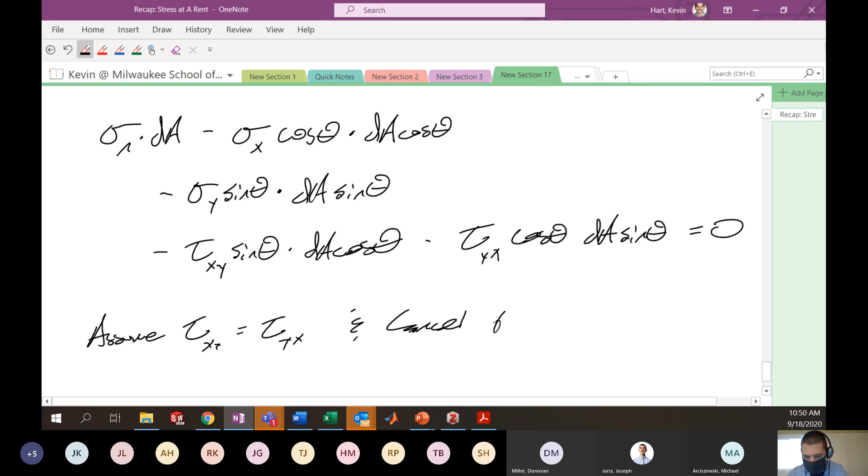So assume tau xy equals tau yx and cancel the dA terms. They all are appearing there. So if we divide by dA, everything's just going to kind of go away.

You're going to end up with sigma n is equal to, and I'm going to bring all these other terms to the right-hand side, make them positive. It would be sigma x cosine squared theta plus sigma y sine squared theta plus 2 tau xy cosine theta sine theta.

And we have achieved what we set out to achieve, and that is writing the normal stress at some arbitrary new coordinate system, sigma n, in terms of the stresses that we already knew, sigma x, sigma y, tau xy, and the angle that n makes with the x-axis, which is the angle theta.